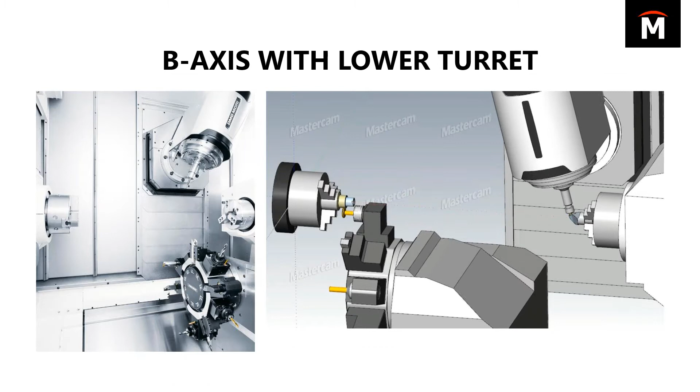Another example are machines like this. It's a Doosan TT series machine, just a twin turret type of lathe. These kinds of machines have really got great potential. Here we're showing some pinch or balance turning, however you want to call it. And then we do simultaneous operations. The main thing is to take advantage of what we call the free cycle time. Having what we've got running on the subspindle happening while we've got a part running on the main really helps on cycle time. And I'll show you how we orchestrate this here in a little while.

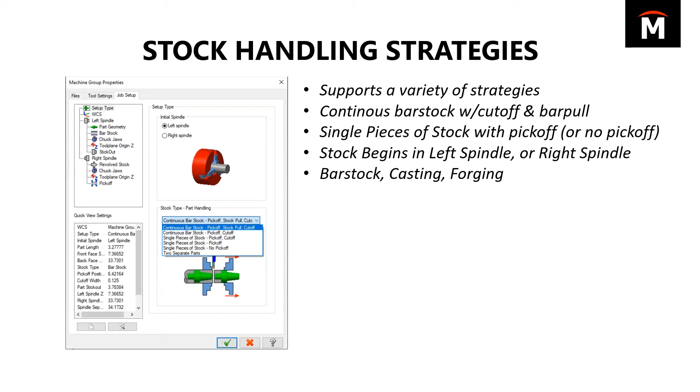You can also do strategies like you see at the bottom: two separate parts. If you have some kind of job where you have an A part and a B part, and both of them make a set, you can run it like that. Even for you guys in the oil field, whenever you have a part that's really long and it needs to be done with multiple pulls, you can take advantage of the rigidity of the machine and then pull it, push it around as needed. You can also tell it whether the stock begins in the left spindle or the right spindle. So it's really easy to control for a variety of work holding strategies.

The way the licensing works on this, as I mentioned, it is an add-on product, and it uses the CodeMeter system to work with the machine environment. So if you've ever seen the CodeMeter that's typically running in the lower right hand of your screen in the task tray, that has to do with Mill-Turn applications and licensing, that kind of thing.

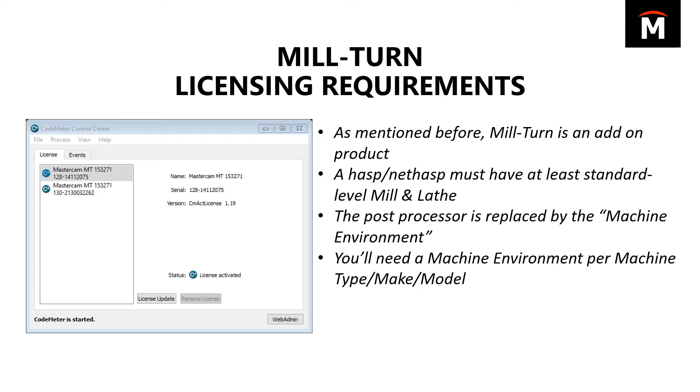The machine environment file includes the unique settings of your machine, and it's set to match the tool number, the tool numbering format, the number of stations you have on the turret. You have half stations, half indexes, and it also includes a simulation of that exact machine, because with all this going on, it's really tough to visualize the machining process. If you're waiting until you get to the machine to do trial and error, that's pretty risky. And it's good to be able to identify things before we get out there. And we'll talk some more on that here in a bit.

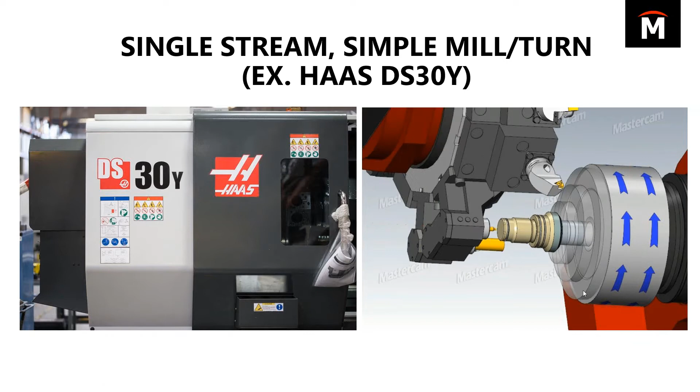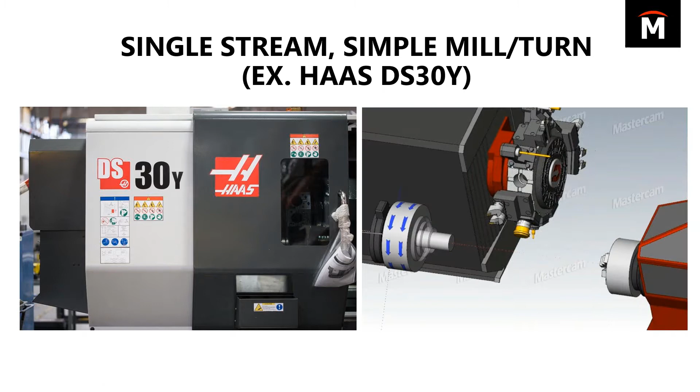But these tool models, I actually pulled them from machiningcloud.com. So it makes it really easy to get an exact representation. And then I've got these holders that are in the machine environment file to let us load this turret, so we can see an exact representation. It's great for planning. It's really easy to not realize that you may have a turning tool just one station over from a really long reach boring bar. You're going to run into clearance issues. We're going to run into that OD turning tool with a long boring bar right next to it, potentially hitting the jaws. So it's just a really great tool to have.

The good thing about the single stream simple mill-turn machines is that it doesn't require the full mill-turn license. We'll talk a little bit more on that in a minute. But with mill-turn, how it differs from standard Mastercam Lathe is in the job setup. It's a more comprehensive job setup, and it's really critical that we assign all these things up front, because it does matter. What size chuck jaws we're using, how much stick out is there with the part. Maybe we're trying to program a part that goes in the through bore and it's bigger than the machine's through bore. You could spend a lot of time making a masterpiece of a program, but then you find in the end you can't even use it. So job setup helps us determine all that up front.

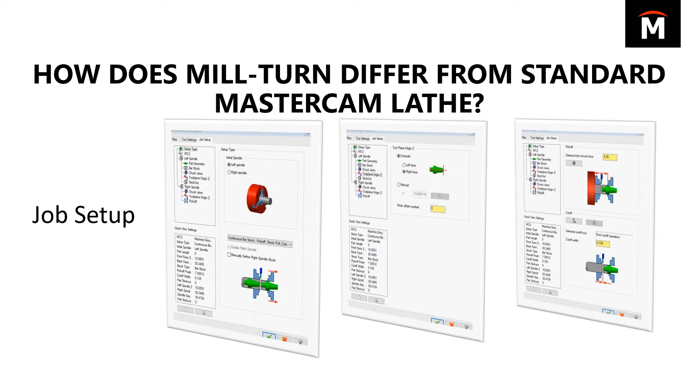It makes it really easy to establish where your zeros will be set. Like for the left spindle, typically I set my Z0 at the face of the finished part, but you can also set it at the step in the jaws or some point in between. And then you can define where the pick off occurs when you're using that sub spindle to come up and pick the part off. Where is it going to grab hold before that part is transferred in to the sub spindle? So that's all controlled through the job setup.

Well, with mill turn, it can derive that on the fly. Basically, if that geometry consists of at least two entities, two different lines, it can derive what plane that feature is at, and take care of creating the tool plane as you see at the bottom of this window. And it's based off of the rotation the machine has to go to get to it. And I'll show some more of that in an example here in a moment.

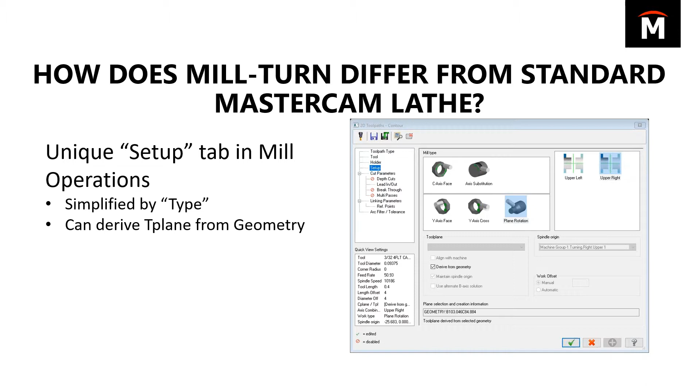But where the mill turn becomes different than what you see in normal Mastercam is with our sync manager. The sync manager is, I refer to it as a secondary interface. Basically, what I'm doing in the main interface, I'm just focused on creating the cutting operations. I'm not concerned just yet about synchronizing things. I'm basically writing it as if it's just one cut happening at a time. And then we take that over to the sync manager, and it divides up your toolpaths across the upper and lower streams, if you have a twin stream type machine.

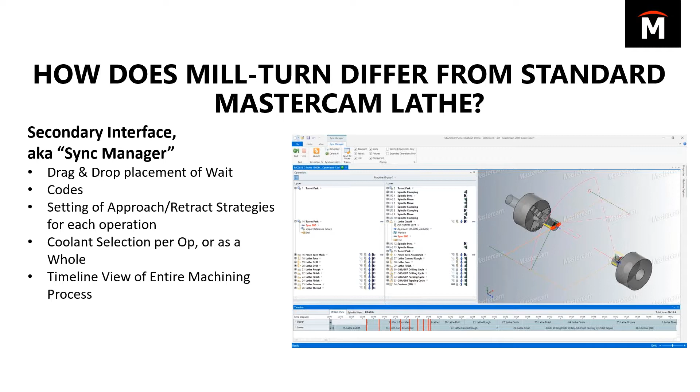But you can see that it has kind of like a Gantt chart at the bottom, where it shows you the sequence of events and the cycle time that it's going to take depending on how you've got things organized. And then when you need to synchronize these operations, it's simply a matter of drag and drop from one stream to the other. And when you do that, that's what's determining where those wait codes get placed in your program. So it just gives you a timeline to view the whole thing.

And then when you've got that timeline created, now we want to talk about simulation. So this is a screenshot of it, but from within that sync manager, you may have seen that there's a button that says simulate. This is what it launches into, and it's a simulation of your very machine. Of course, you can go in and hide out the machine housing. I typically hide out all but the kinematic components just so I can see it.

But this is your virtual prove out of this, and so when you start running simulation, you may see areas to improve. This is what lets you fix this up, and it also lets you see if you can change reference positions. That's another thing that you have control over, is you don't have just one spot to send a turret to change indexes. You can go in and establish new reference positions.

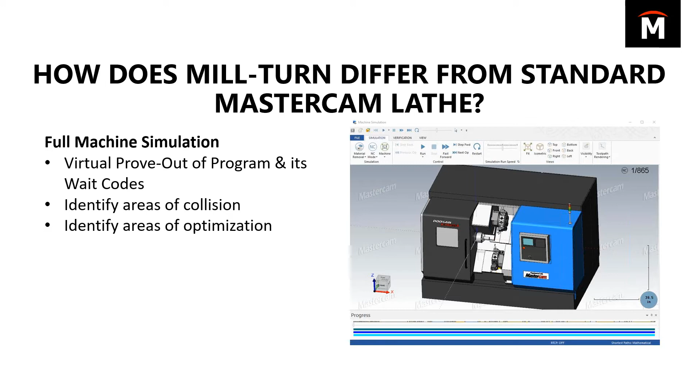Like myself, what I'll do is I'll set a reference position that's just far enough back to clear the longest tool, so the turret is really doing a minimum of indexing. But then sometimes I may want to move that turret completely out of the way. I can set reference positions for that. So let's see it at work.

So we're going to switch over to Mastercam now, and I'm showing this in Mastercam 2019. This has been in Mastercam actually since X7, so it's been here quite a while. But we're going to talk about what we've got for present day. So I'm going to open up a mill turn file. We'll start with the B-axis type. So when I open this file, you'll notice, give it just a second,

I'll see this Code Expert open up. A lot of you guys, with Code Expert, you may use it for your posted programs, but you may just choose to go to Cimco or whatever. But with mill turn, it actually uses this Code Expert interface, as we'll see here in a bit. But for right now, let's take a look at what we've got.

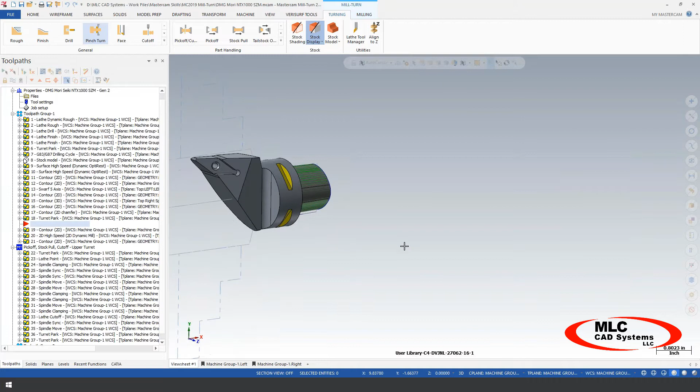Basically just for fun, I downloaded a model of a Capto style turning holder. Thought I would make a program to actually make this. Great application for a B-axis machine. And you see I've got my toolpath groups just like you'd see in standard lathe, where as I work my way down through it, I've got the roughing operations, milling operations, and things like that.

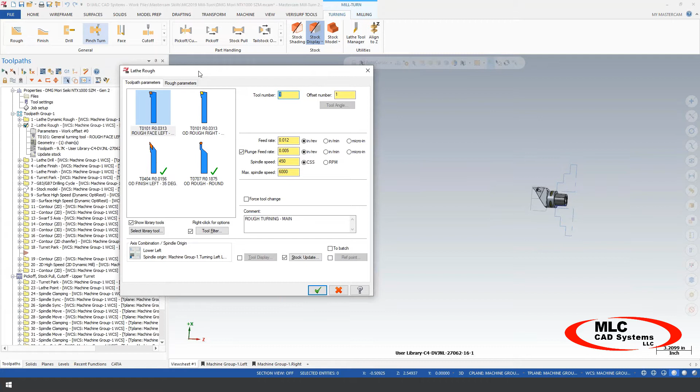This roughing operation, when you go to create this toolpath, on the toolpath parameters page, it still looks pretty similar to what you find in standard lathe. But what's determining what turret and spindle combination, that's controlled by what you select down here at the bottom for an axis combo. When you click on this, it looks pretty similar to standard lathe. But this is where we're choosing whether we're using an upper or lower turret, if we're using the left or right spindle, that kind of thing.

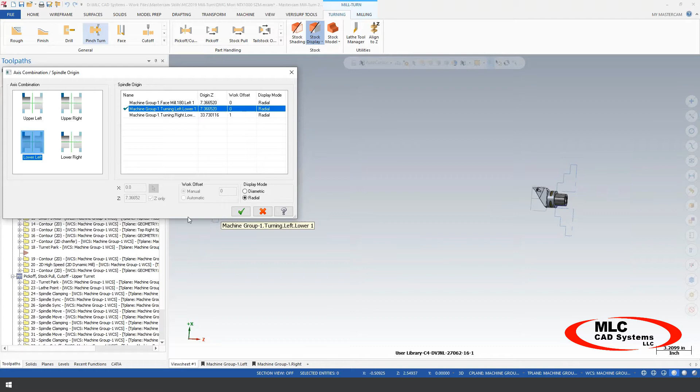And that's what dictates what tools you see given to you in this menu. And then when we go to our milling operations, we have this OptiRest toolpath that I'm using over here.

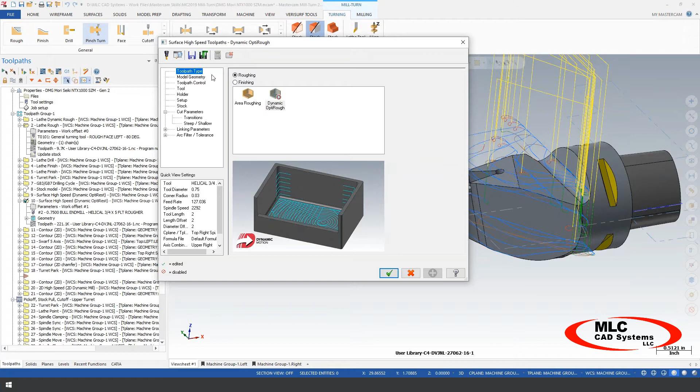And when you go and look into the toolpath parameters, we work our way down the list. We got tool, we got holder, just like normal, but go to the setup tab, and this is where we have what's unique to mill turn. This is where we can choose it. Are we doing C-axis face milling? Are we doing Y-axis cross, which is what we're doing in this case? Basically, the spindle's vertical over it, doing that work.

And then we get a little further along to right here. I'm using dynamic mill to machine out that insert pocket. And that insert pocket is not parallel with the center on that tool. It is at an angle. So when I look at what we've got going on in here, and I go to that setup tab, you can see that I'm choosing to do a plane rotation. It's basically a combination of a C-axis angle and a B-axis.

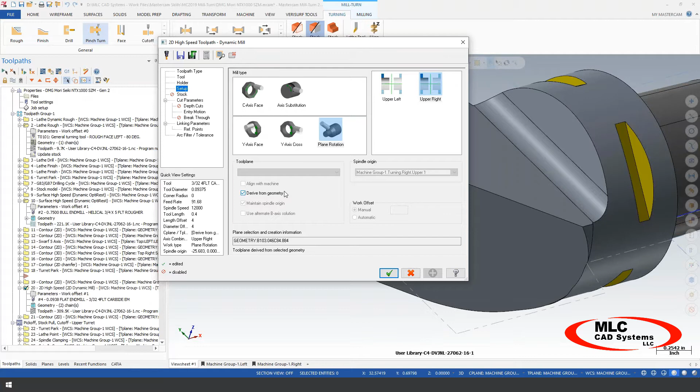And I got it set to derive from geometry. I didn't have to define a tool plane before I created this operation. It's able to derive it from whatever geometry has been selected, which is what we've got here. So a very nice feature of it. Just makes it really easy to take care of finding those tool plane angles.

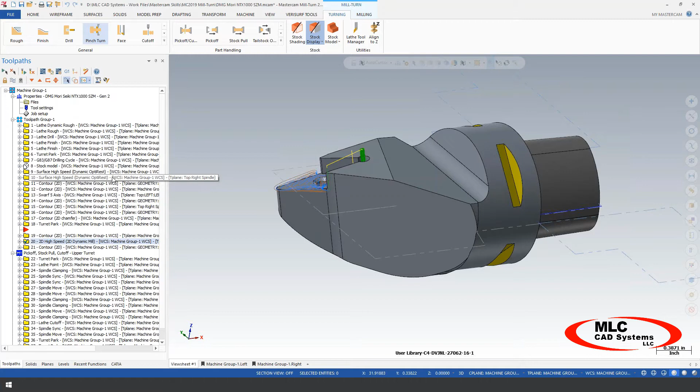But after we've got all this done, like I mentioned, all I'm really concerned with is creating my cutting operations as if I'm cutting one cut at a time. Now, ideally with these machines, I want to be doing multiple tasks, or as many as I can at a time. So what we do is we click what's normally the post-processing button. But when I click that, instead of creating code, it's sending this to the sync manager interface. That's what we're going to see pop up right here. So I'm going to expand this open so we can see it.

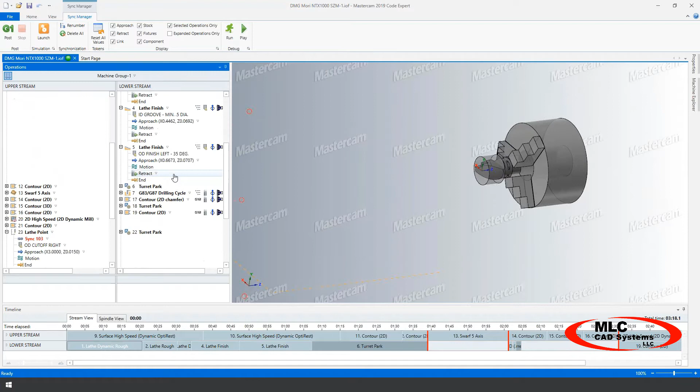So what's happened here is all the toolpath operations that we've got in the main Mastercam file, it's divided them into what's using the upper B-axis spindle, which is what we see here, and then what's using the lower turret. And if I expand these open, eventually we'll see, like right here, there's a sync point. We've got sync 103. What I did is I had to synchronize this lathe point operation to not begin until after this Contour 2D is done.

And I'll just show you how easy this is. Basically, I'll just delete only that one. So what I need to do is just take the end of that toolpath and synchronize it with the start of this one. And I'm just dragging and dropping this over. And when I do that, that's what creates that synchronization point. And if you look at the bottom of this Gantt chart, you can see if I delete that again, it's happening somewhere here along the way. That's what's determining the order, and also determining the cycle time that it takes to run this part out. So I'm going to click the save button so it keeps it all linked.

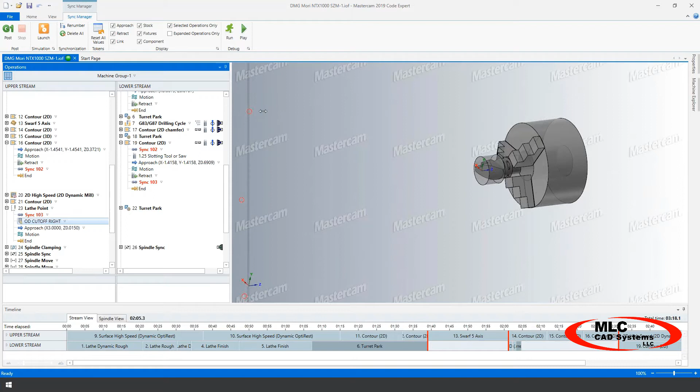Also in these operations, just expand it open a little further. At the very top, you've got options up here where you can control for different coolants. Like if you're going to have the shower coolant on the machine bed running, you can fill in fields like what you would have in the top of your NC file. Chip conveyor controls, different kinds of things that are unique to the particular machine type you're using.

And then on the toolpath operations itself, say for this Contour 2D, I've got things where I can tell it what kind of approach strategy we are using. Is it Z first, X first, or direct? So it helps you get around, say if you have a tailstock or a steady rest, things like that. And you also have controls in here on the retract, on how it does its retract, and where it is retracting to.

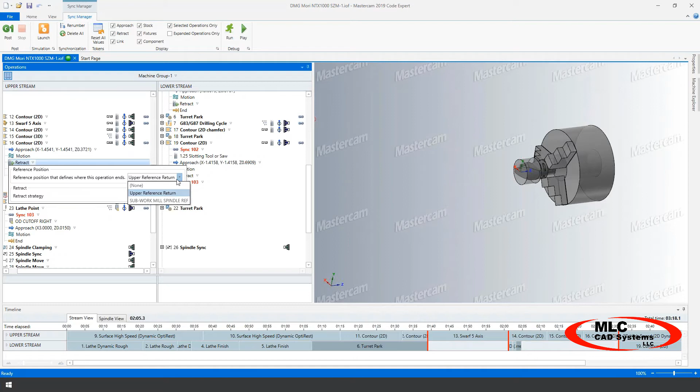This is where I'm talking about the ability to create these different reference positions and choose where to go there. But after you've gotten this done, the next step of this, at least for me, is I want to see a simulation. I want to see how this plays through based off of what we've gotten. So at the top of the Sync Manager window, we've got the post button. That's where we can finally create code, but we're not ready for that yet. We want to go and run a simulation.

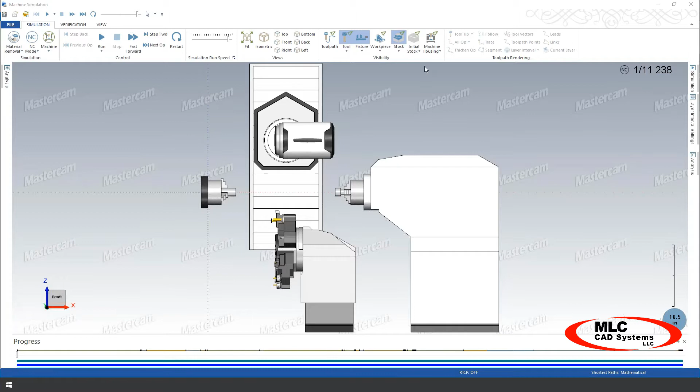So what this uses, and you may have already played with this on the mill side, but Mastercam has the machine simulation interface we call MachSim built into the software, and it uses that MachSim platform to simulate what it is that we have set up so far. So we're giving it just a few seconds to initialize and get started. But I can have it show the machine housing if you want to see a representation. In this case, we're using a DMG Mori NTX 1000. Turn that housing transparent, or my preference actually is just to turn it off, make it easier to see.

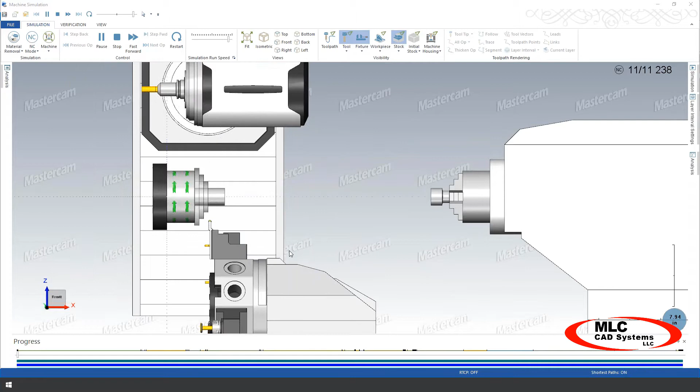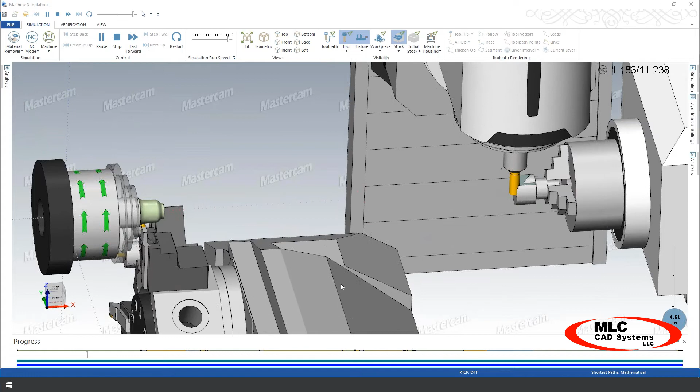But we go and click the play button, and based off of what we've got our settings at, that's what's going to control the order that stuff runs in. So even though I programmed it to run one toolpath at a time in the main interface, you can see over here, this is where I get to see how it's going to play together. Is it going to be okay to run? But in my line of thinking, if I owned one of these machines, this is what I would want to see it doing. I don't want to do just one cut at a time. If I've got dual stream capability, I can use it to do two streams at a time. So really cool stuff on that.

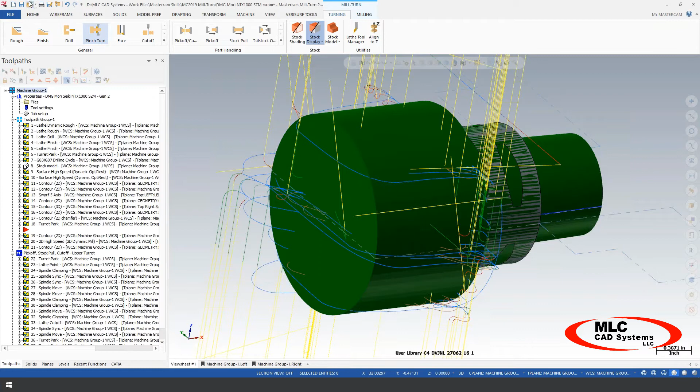Now I'm going to switch over to a different example. This was the example of using a B-head type machine. So we're going to switch over to a dual turret style. So we've got the Doosan demo file. That's what we'll look at here. So on this file, it's really just simple, more standard turning and live tooling work. There's no compound angles involved in this. It's perfect use of the twin spindle type of machine. So another thing I want to look at with these machines is if we can optimize the cycle time, the total run time of it. And that Sync Manager comes in really handy for that.

So I'm sending this over to the Sync Manager, and just like before, it breaks it down per stream, like what we see here. I'm going to condense the view of this just so we can see the entire runtime start to end. So it's telling me cycle time is 7 minutes and 20 seconds. And what I'm looking at in here is the more you could spread that runtime equally across the upper and the lower turrets, the more benefit to the runtime for you. And I see that the lower turret is done with its cycle time almost 2 minutes before the upper turret is done. So that makes me think, maybe I can take some operations that are running on that upper turret and move them to the lower.

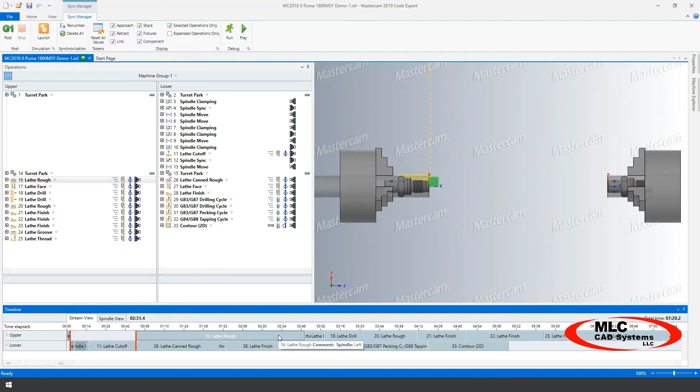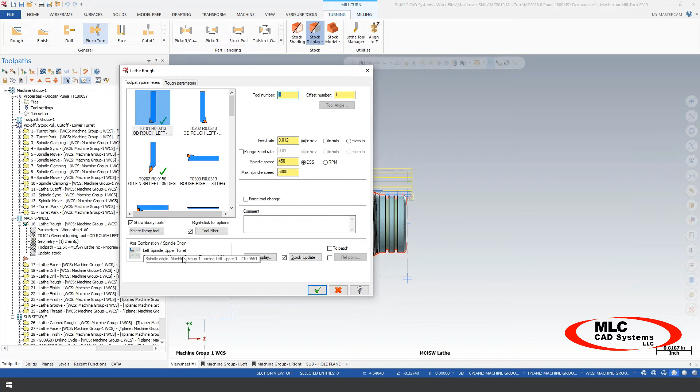But I have an even better way of this. One thing I look at is the roughing time. That block of time right here, that's where it's rough machining the profile on the main spindle, and it looks like almost a minute and a half of time tied up in that. So with mill turn, I can go in and do pinch turning out of this. So let's take that cut, for instance, and it's this one right here, operation number 16. I'm going to zoom in a little closer. Right now it shows that we're set up using the left spindle upper turret. So I want to see if I can make the lower turret come in and help us out with this, get this run out more quickly. So what you do is you first create what we call the parent roughing operation.

You create the parent op first, and then with the red arrow immediately following it, that little insertion arrow, I'm talking about that thing you can drag and drop anywhere within the file. That just determines where the next toolpath you create is going to go. But up here in the turning groups, you can see that you've got something up here that you don't have in standard lathe, and that's pinch turn.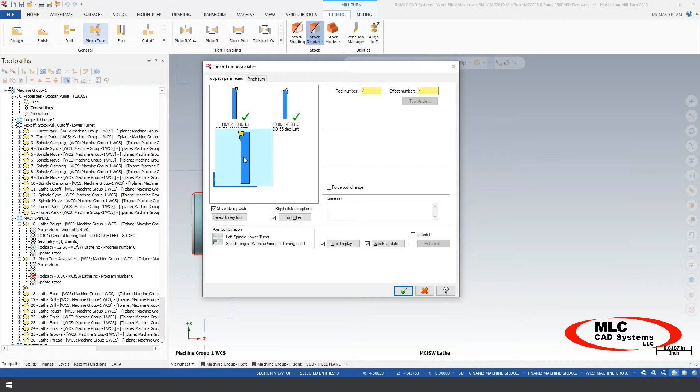But anyway, we choose that tool, and then we go to the pinch turn tab, and it's very easy. We just need to select out of our toolpath list that roughing operation, which is number 16. That's what we're going to make into a pinch turn. So we've got that selected. The next thing is you can choose to either do pinch turning or balance turning. Pinch turning is where the first cut, like in this case the upper turret, is going to start a half a second sooner than the one on the lower, just so they're not right at one another. You've got different options for controlling that.

Another option is balance turn. Basically, these cuts are on the same pass as each other. We're just doubling the feed rate. It gets through more quickly. If any of you have ever encountered chatter on long parts where there's not much support in the middle, if you've got these kind of machines, you can use this to counteract that flex, that chatter that's occurring. It neutralizes the force that it's up against, and it really helps you get better finishes and things like that.

But we can tell it here to do a balance turn on first pass only, or my preference is to have it balance turn every pass. So click OK to that. And it still looks like it's running one tool at a time, but don't let that fool you. Of course, we need to go in and regen the rest of our operations so that they jive with it. While that's regenning, I'll just go back. I just want to review again.

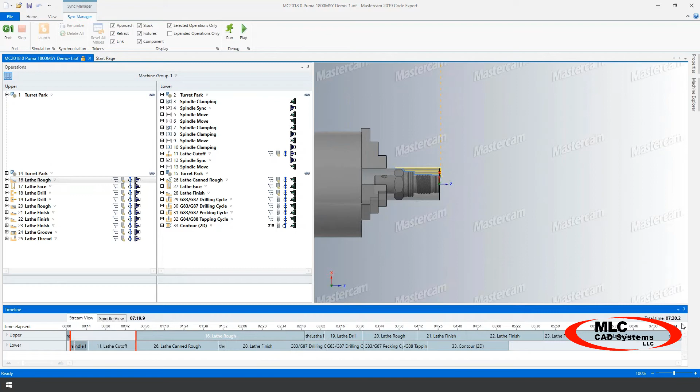You see on the sync manager how the cycle time is right now when we're roughing with only that upper turret on that part. Total cycle time 7 minutes and 20 seconds. Well, now we've made this change, we're going to resend this to the sync manager, and we want to see what difference this has made. So yeah, this is much better. Look at this. If I go and condense this down again, we've just about got the cycle time equal from one turret to the next. We eliminated that almost 2 minutes of time with the lower turret sitting idle.

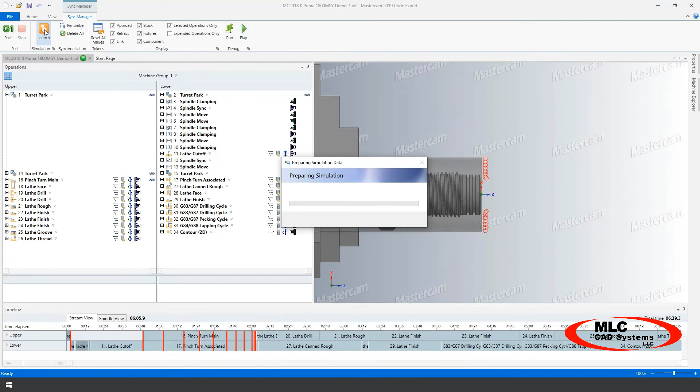Let us spread this out, and those red lines indicate synchronization points. So let's have a look. Let's see how this plays out. So we click the simulation button. Let this start up in the MachSim interface. Myself, I've used simulation big time. I don't want to have an expensive surprise at the machine if I can just have a pretend surprise here on the computer and not cause any damage or any downtime. Very important tool. These machines aren't cheap to fix.

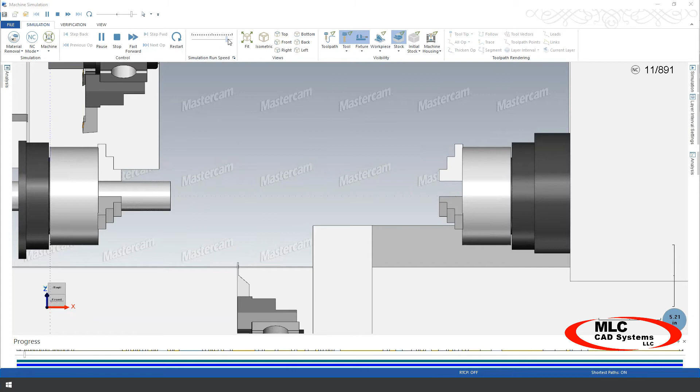So we'll go ahead and run this and have a look at how this is going to play for us. First thing on this part file, the way I set it up is it's doing the stock pull beforehand. So you'd have to imagine the part was already complete in the main spindle to begin with. This is where we go and pass it to the sub. This shows a breakdown of the process.

Shows it feeding in. Even shows the chuck jaws opening and shutting. And it's doing this while this is spinning. It's really important to keep the part spinning during the transfer, because if it's sitting idle, sitting still, that's a chance for a chip to be on the jaw and you grip on the part over that chip. We don't want that. Keeping it rotating keeps that kind of stuff from happening. So we got it pre-pulled.

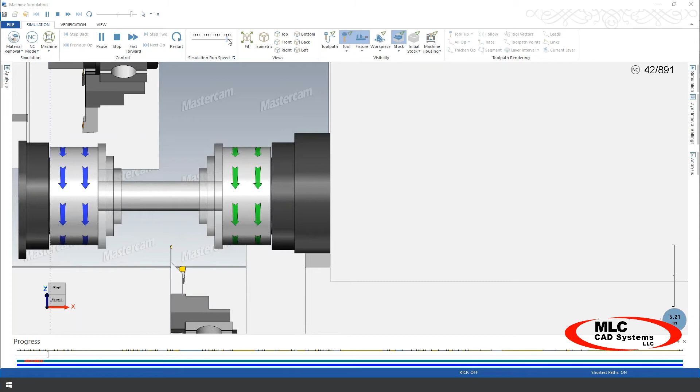Next thing is we'll come in and do the part off. So like I say, you have to imagine that part in the main was already done. So now we're going to work the other side of it when this guy retracts back to the home position. But here comes that pinch turn that we've set up. So it's got the first tool in position and it's waiting. Remember, we've got the wait code here. It's waiting for this other one to get there.

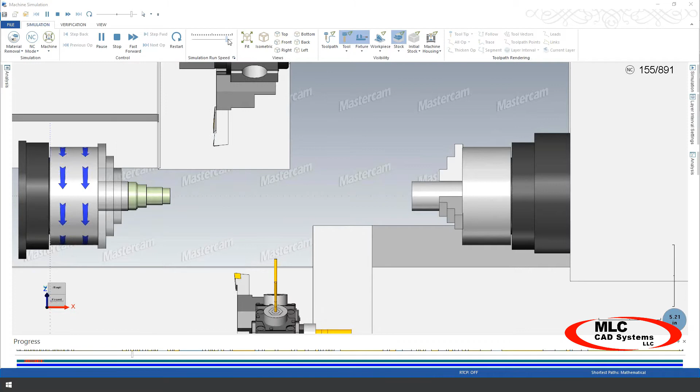And then when they meet, now we've got it running both of these guys at a time. That's really where most of the metal removal is occurring on this part anyway. So now that roughing is done, now the lower turret can go back to handling the work to be done on the subspindle. Very cool.

And you can see how we can simulate the approach and retracts. Right there, having the direct approach rather than Z first or X first. That could be potential for a collision. So it's really good to know this kind of thing ahead of time.

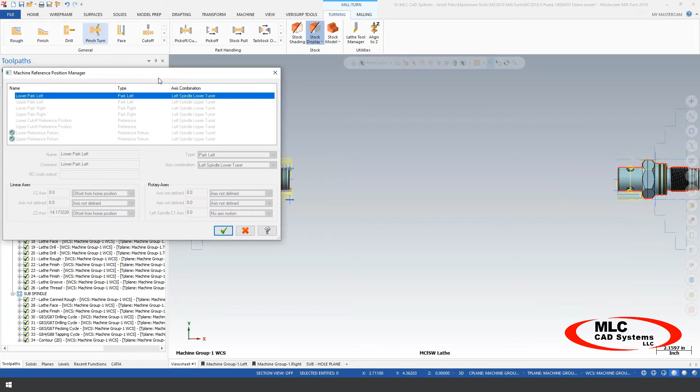Another thing to point out is how you can load the tools onto your machine's turret. So if we go back into the standard Mastercam lathe interface, the regular interface, you guys may have seen these buttons in the toolpath operations tree. You've got setup tools on machine, and you've got reference positions. Well, the reference positions, that's where you can go in and create new reference points. This one, I don't have any custom ones created, but if you want to make a custom ref point, you can right click in here and say make a new reference position.

You can give it a name. The name you give it here is what will output in the program. And then you can go and set where is this reference position in X, Y, and Z. If the spindle needs to be turned a certain way at a C angle, you can set that as well. This tool is really handy for you guys.

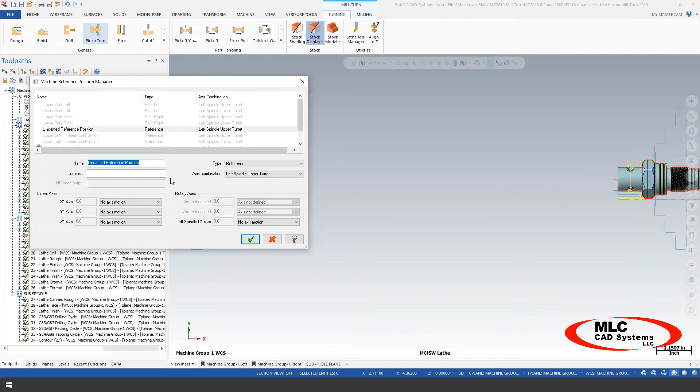So you've got the deep reach boring bar on that Integrex, and you're going to be doing boring work on the sub spindle. Well, that tool comes out of the tool changer pointed to the left, and we got to get it turned to the right. This is where you can have that B head back all the way over to the right end, then start swiveling simultaneously in B so that you don't hit the part with that tool as it comes around. Really cool stuff.

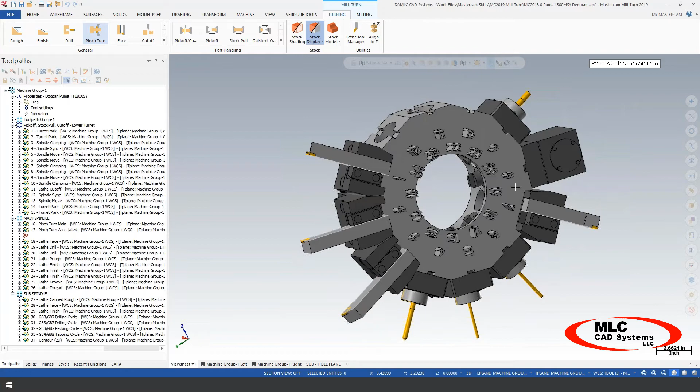But other things in here is the tool loading. So when you go to the tool loading, again, you only get this in the mill-turn product, but I can go to that lower turret and just view all the components on it. I can see how it's loaded. And if you've ever finished your program, gone to the machine, set up and run, and you realize that the way you got it numbered is not going to work, it's kind of a frustrating thing. This allows you to see all that up front.

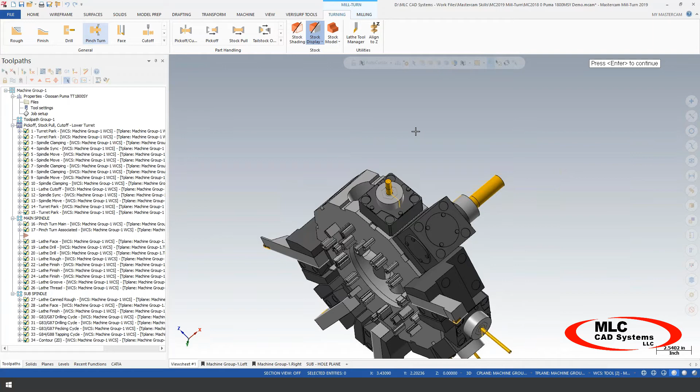You can see if you got your tools positioned where it's needed. Things like this right angle drive live holder. It's pretty bulky, so I probably want to keep it far away from the more short projection types of tools. You can also go in and set projection lengths. Take this one here, for instance.

So we can right click on it, set projection length, and it shows you a model of that tool, and this is where you can go in and change where this guy is set at. And this can be carried over to your setup sheets. You can have a setup sheet where it details for the operator exactly how to load it, what kind of projection is required. You may have seen earlier in my video of the Haas DS30, I didn't have my part off blade sticking out enough.

This is where I can go and adjust for that. So it's a nice feature to have on things like this. But after you've gotten all this stuff done and you're back over this interface, because I made changes, it won't let me post yet because of that little lock button. It means that this is disconnected now from any new changes I made over here. So no problem, we just resend it to the sync manager again.

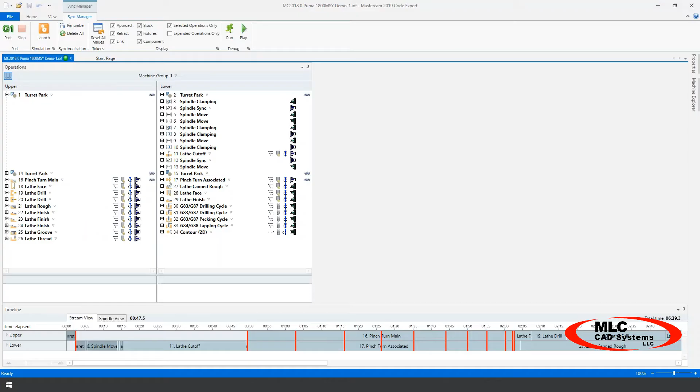We get this guy sent over, and let's say we're happy with how things are running now. So now we're ready to generate some code out of this. So we'll click the G1 button to post some code.

Looks like everyone's still with me, so doing good.

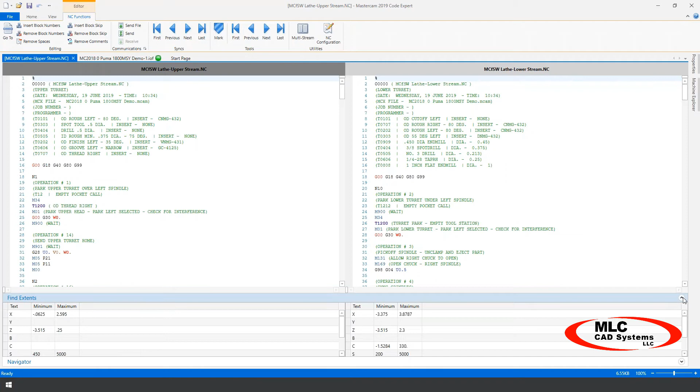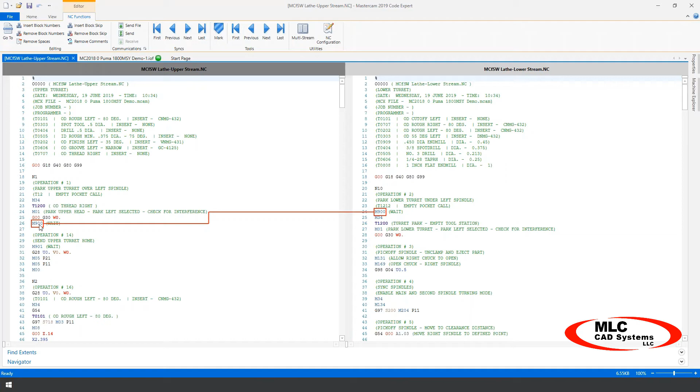And this is the dual stream output. This machine basically is running two programs. As I go through this, it automatically shows me the extents of the program, extents in X, Y, and Z. I can hide that for now, but as I hover over wait codes, like right here, I'm just hovering over with my mouse, it puts a graphical view and shows you where it's linked to the corresponding wait code in the posted program. I think it's a little bigger, the zoom.

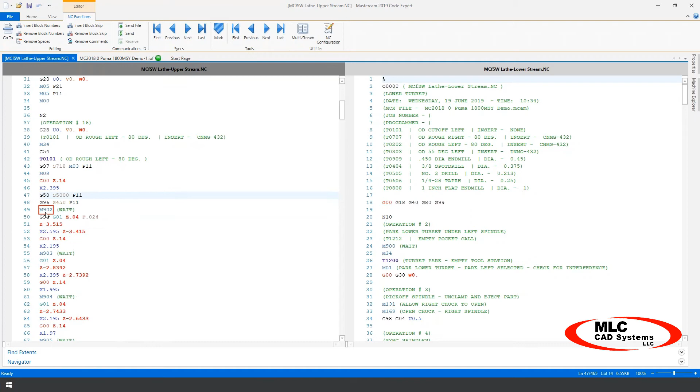Yeah, so as you work your way through it, you can have it go from one sync to the next. Just work your way through it. This is a good way for you to look through your code after it's posted, and you can see how things are lining up. This right here, I can hover over that, right click, and bring the matching sync point into view.

See, I've got all these wait codes happening one after the next. This is that pinch turn operation we made. This is where it's using a tool on the upper turret and the lower turret to simultaneously rough it out. I mean, imagine writing this out manually. I don't even want to think about it. It's all about making it easier for you. And then, of course, when this is done, that's when you can take the file over to your machine and begin to run it.

So that's what we've got to talk about on the dual stream mill turn machines. Let's talk about those of you out there that have machines such as the Haas DS30Y, and I'll point out that we also cover the Haas ST series machines, the single spindle, non-dual spindle machine. We cover that as well.

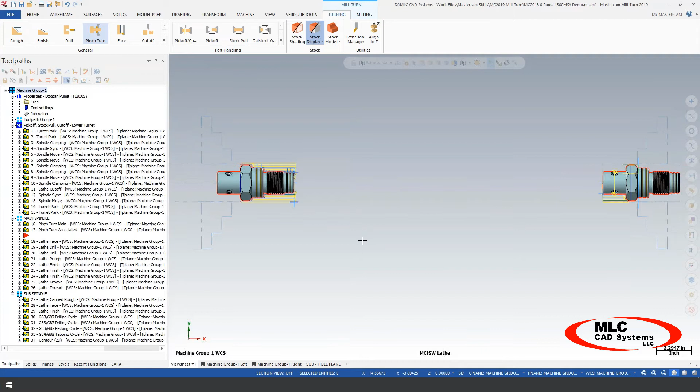And to talk back on the licensing, machines like what I'm showing here, this is a true mill turn, multitask machine. It requires a mill turn license, and it also requires a license for the machine environment. And you'll need a machine environment for each type of machine you've got. Now, if you've got a shop full of the same Integrex 400, then you only need one machine environment. But if you've got an Integrex 400, an Okuma Multus B400, a Doosan MX, those are different machines, and those require different machine environments.

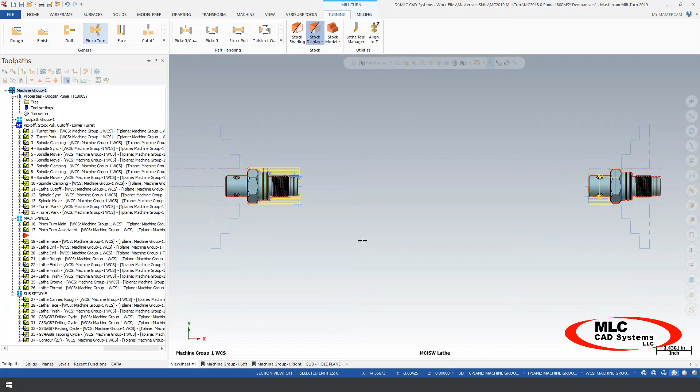But with the simple mill turn, and we're going to open up a file that helps us illustrate what I'm talking about here, simple mill turn doesn't require a mill turn license. It does require the machine environment, but because it's not possible to synchronize operations on a machine like this, we have just what we call the simple single stream machine.

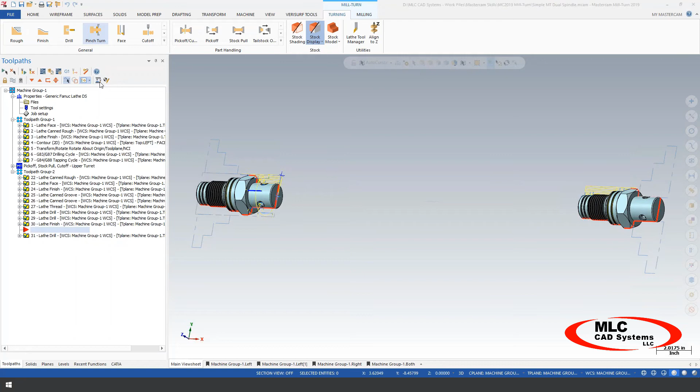So on this one, this is where I got creative, and I had gone to machiningcloud.com and downloaded all these models of these tools. Waiting on it to pop up here. I guess it's loading it up for us. But these days it's more common to find these machines outfitted with the Capto style holders. You can see on this one here, for station number 9, I've got a dual holder.

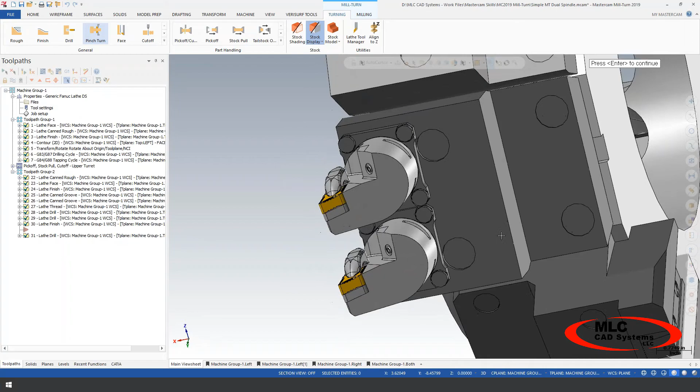This machine has a Y-axis, so we can go off center in Y to get to one tool or the other. I don't use up so many indexes on my machine this way. And I've got some others, like right here, I'm just using the single station. This particular machine also supports half indexes. So here we've got a center drill loaded, and right next to it in that half station is the drill.

If it supports half indexes, take advantage of this stuff. It really helps you get a lot more cutting tools on that turret. And so here I've downloaded everything, including the grooving tools, and it looks like a real groove tool. Like I say, this is all from machiningcloud.com. You can also go to sites like Sandvik CoroPlus. Anywhere you can get the 3D model, it really helps out on letting you more realistically simulate this kind of stuff.

So I'm going to hit enter to return back to here, and then from this view, I'm going to show my reference positions. So you can see here, the grayed out reference points are just the standard ones. That's things like your G28, U0, W0, just the machine home. We've also got park positions, but I've made these other ones. I've got sub for that long drill. I wanted to have the turret move away 8 inches before it indexes to it.

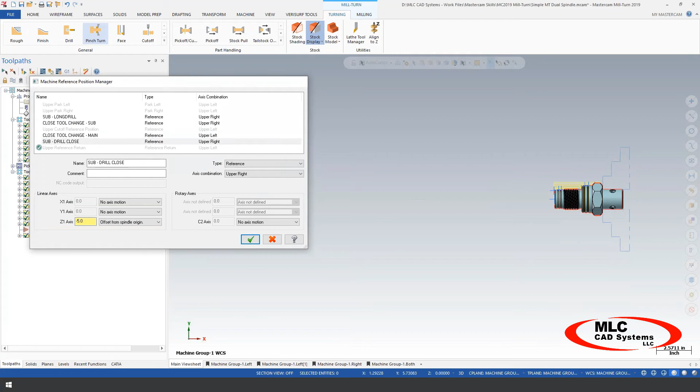And then when I'm using my short rigid tooling, I just set a close tool change position for the sub where it's backing off a real minimal amount. Same thing on the main spindle and all that stuff. And where that corresponds is when I go to send this to my sync manager. Let this come out here for us. So in the sync manager, you notice now there's just one stream. Those other files had 2. Well, there's only one turret on this machine, so we only need one.

But as I go through these, I can look at each operation, expand it open. I can set a reference point from where it begins and where it goes to at the end. So right here on the retract of that, I have it going to that close tool change rather than all the way back home. Over a run of several hundred parts, that travel back and forth to home really adds up. So the closer you keep that in, the better you do on time. Obviously it's very important that the machine is set up right. I want to make sure they understand they can't have tools hanging out any more than wherever you specify on the stick out length. But it lets you control for all this. Just makes it really nice.

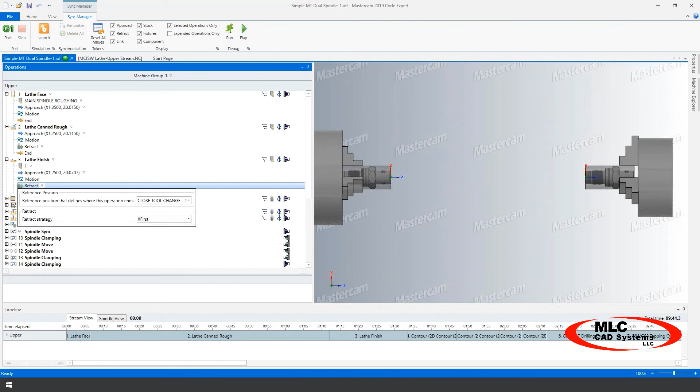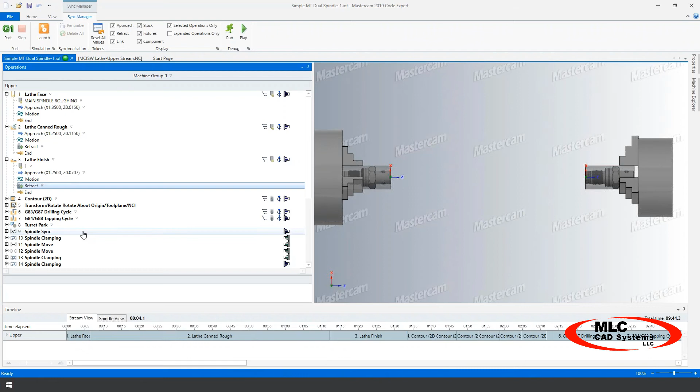Because on machines like this, creating the tool paths is one thing, but the other thing is getting them to play with one another properly. These reference points and stuff. It doesn't make as much sense to just set one really long reference point because you've got one long tool in the machine. This way you can set it unique from one to the next. Of course, down here we've got the playout of the process, and there's just one stream. We only have one turret to use, but I see these machines a lot of places I go, and this really gives you a nice means of being able to control for these and a much more visual way of doing it. So we're going to show the machine simulation really quick.

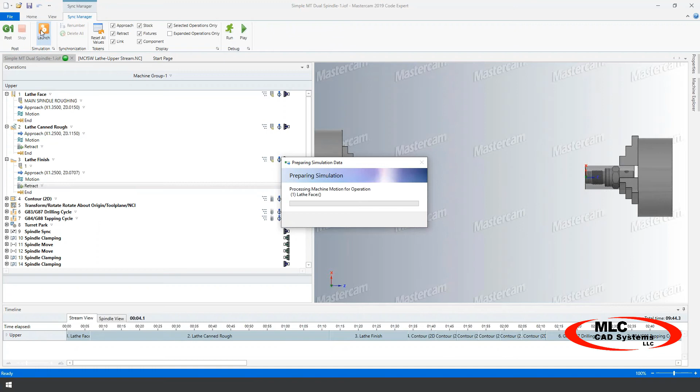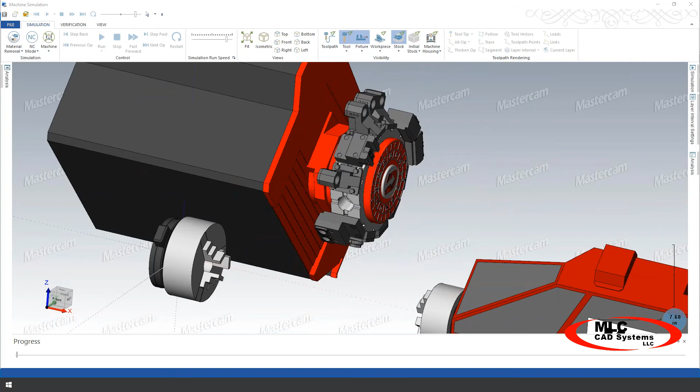That machine simulation loads the turret in there just as you'd loaded it in the main interface. It has all the tools in position as they're needed. It just gives you a chance to see. Right now it's still loading, so we'll give it a second here. We'll see all these guys still out. But just having this alone, this can be saved as a presentation file, so it can be put on a computer out in your shop. You can even run it on your computer in the lobby if you want to give a cool show for your customers as they come in. But go and play this through. Just gives me a chance to see how it's going to happen.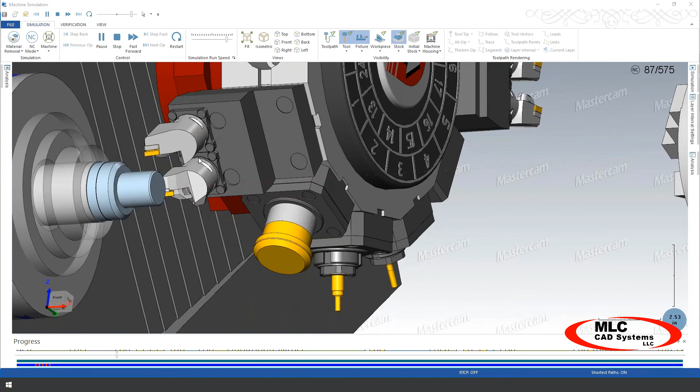So you can see here, we're taking advantage of the twin station turning tools, using one tool to rough it out. And then after it's done roughing it out, it just moves over in Y to the next tool. So, no need to index it. It's really easy to run out of room on the turret of machines like this, especially when you've got several different tool types on it. But just really handy. And you can see that it's let me plan for everything. I've got the stick out lengths on the step drill, the part off blade, all that good stuff. Here we're doing the live milling on these flats. But really nice product.

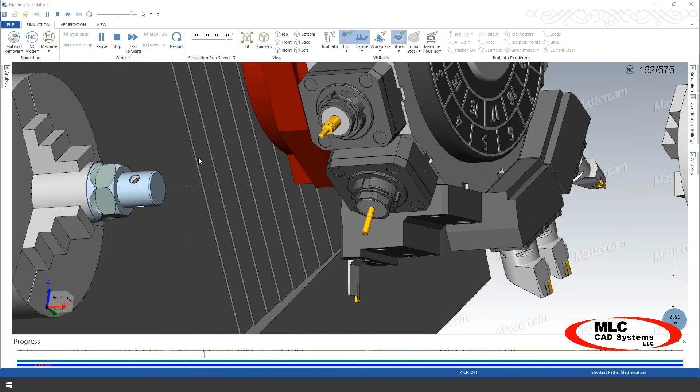It's definitely a great way to speed up your machining time. So do you have machines like this? You have mill turns, and you want to find ways to be more productive than you are right now with them. We can definitely help.

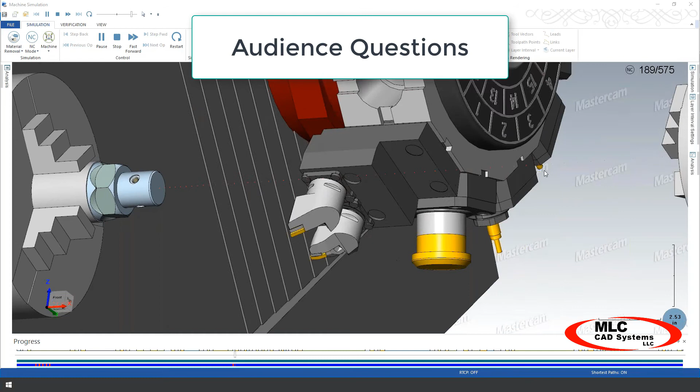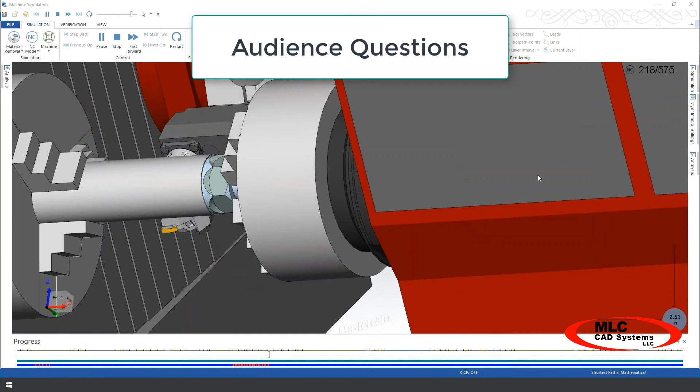Now here's another question. What is the primary difference between Mastercam and mill turn? All right, so really, the biggest thing that stands out to me right away is how it uses the sync manager for posting. You can't just post code directly from Mastercam. It posts it into that sync manager. The other thing that makes it different is the way that the job setup is and the way that the toolpaths interact with it. You may have seen that setup tab that we have in the mill operations. Things like that just really make it easier to derive those tool planes and stuff like that.

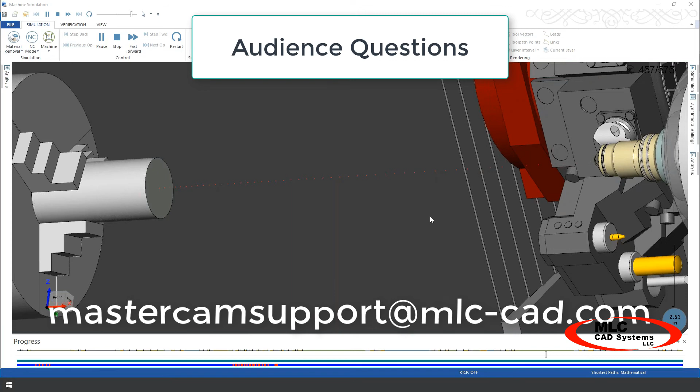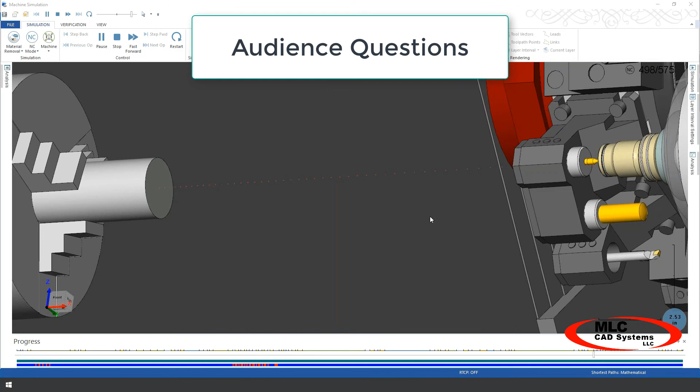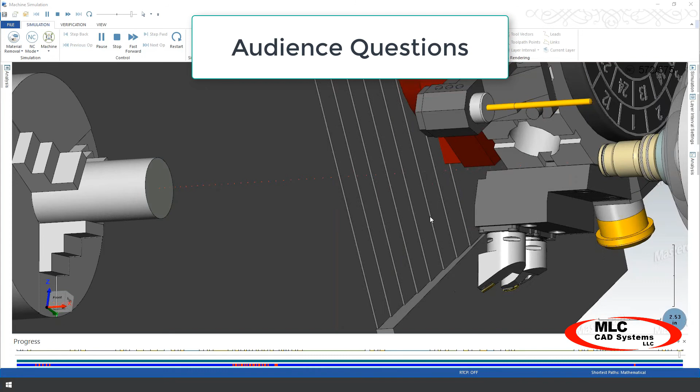Another one is, do you have beginner classes? Yes, absolutely. We have monthly scheduled Mastercam Essentials classes in all of our offices. These classes are held in office because it does require a training computer, and we've got computers that are up to speed on all the hardware, software licensing, all that good stuff. And then we have Mill Essentials, which is a 3-day class, and we have Lathe Essentials, which is a 2-day class. And then for mill-turn training beyond that, it requires you take our mill and lathe essentials first. Mill-turn builds on concepts learned in that.

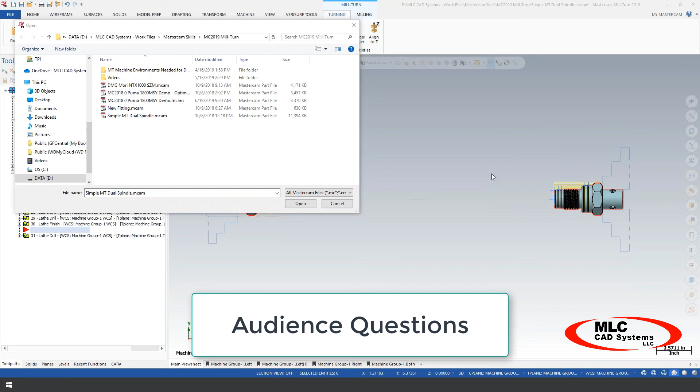Another one is, what is the Home Edition? Well, this Home Edition, I'll just show you. If you go to your browser, and I've got to rearrange my windows here real quick. Let's go in here and have a look at this. Go to my favorites. Yeah, so if you go to Mastercam's website, you just go to mastercam.com. That's what I'm about to go to here.

You may notice that their website is pretty fresh. It's been updated recently. But if you go to that downloads link, right here at the very top it says, give Mastercam a try. Click here to request a copy of the Home Learning Edition. That's where you get it. So, check it out for sure.

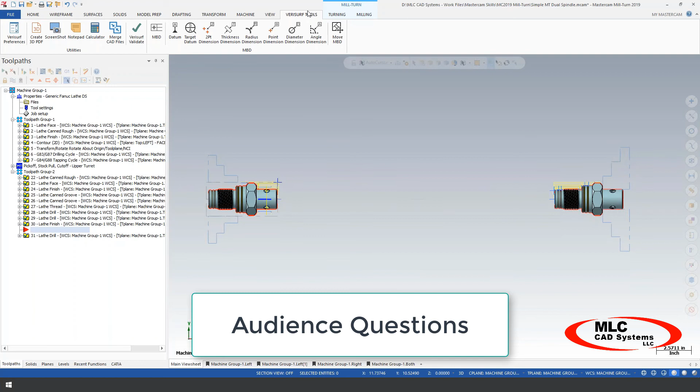Another one here is, you see the VeriSurf tab at the top of my screen. So let's look back in Mastercam. Got this tab called VeriSurf. VeriSurf is a third-party product of Mastercam. It's a metrology package. This is where we can sync this interface with things like your CMM, or if you have a portable measurement arm, we offer what we call the Master3DGage. It lets you write those CMM programs, and you can fill in all the GD&T data, or you can actually import it.

If you're bringing CATIA files that already have MBD data within it, MBD stands for model-based definition. You have any customers that tell you, oh, we don't have a drawing, all the info's in the model, and you may look at the model like, well, I see a hole. Is that a tapped hole? Is it reamed? What's the true position? And they'll say, well, it's in the model.

Well, you need to talk to us, because I've gone to customers before and I show them that it's in there. It's model-based definition. It actually puts the dimensions on the screen, puts the GD&T data. It defines what the datums are. And when you use VeriSurf, it ties into that. So if you absolutely hate writing CMM programs where you've got to write in all the tolerance data, it can pull that from the MBD data within the file. So check it out.

So the primary purpose of Mastercam is to take a design and make it. Yeah, that's pretty much it. If you're making it on a CNC machine tool, Mastercam is all about creating that code that you take to the machine, the code telling the machine how to make the part.

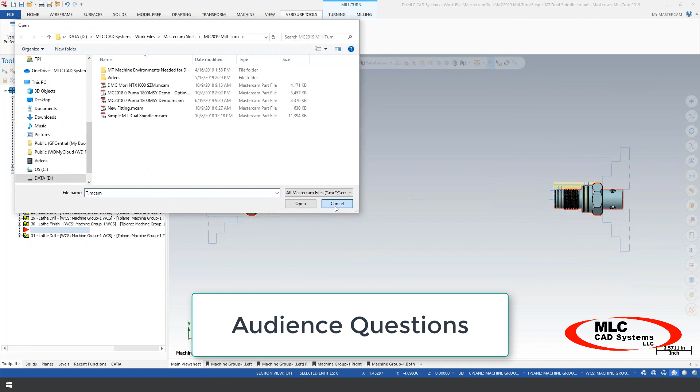But if you were using Mastercam for SolidWorks, you wouldn't have to worry about any of that, because when you update your CAD model in SolidWorks, everything stays associative. The same is true of your toolpaths when you're running it in Mastercam. If you have a currently maintained license of Mastercam Mill or Lathe or both, you can run it within SolidWorks.

It's simply just a download. You have to download the software. It is separate from the Mastercam download, but you download and install that. It'll show up in the list as an available add-in. Mastercam basically runs as an add-in within SolidWorks. If you're an OEM type shop and you do design changes frequently, that's a real time saver.